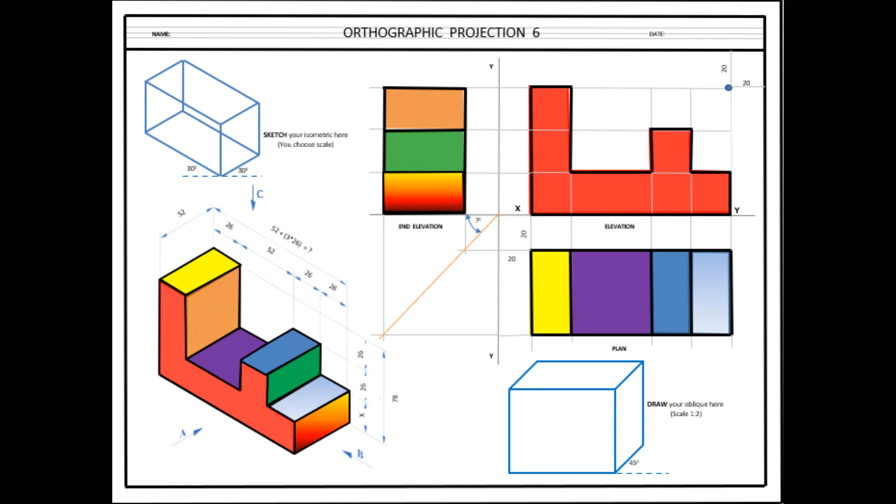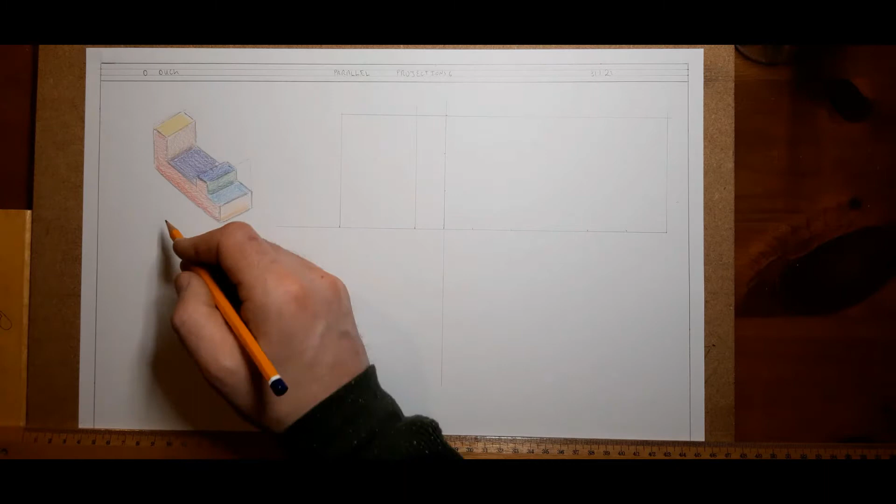I've gone ahead and sketched out my isometric here on the left-hand side. Remember, isometric is going off 30 degrees to the right, 30 degrees to the left-hand side as well. Today, we're asked to have our elevation looking in the direction of arrow A, and we were asked to have our end view looking in from the right hand side.

So when you get the end view, if you're looking in on the right, it goes on the left. So I've set up my basic crate to take that with the max dimensions, and the same with the elevation, it must fit into that.

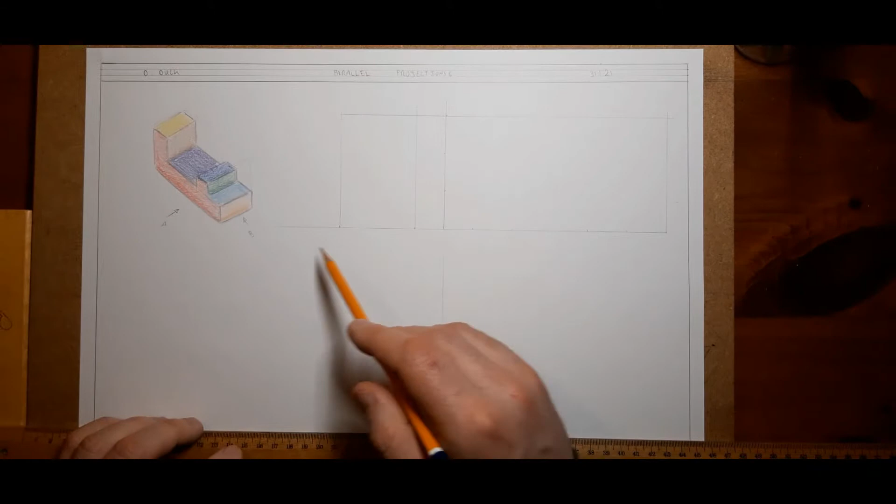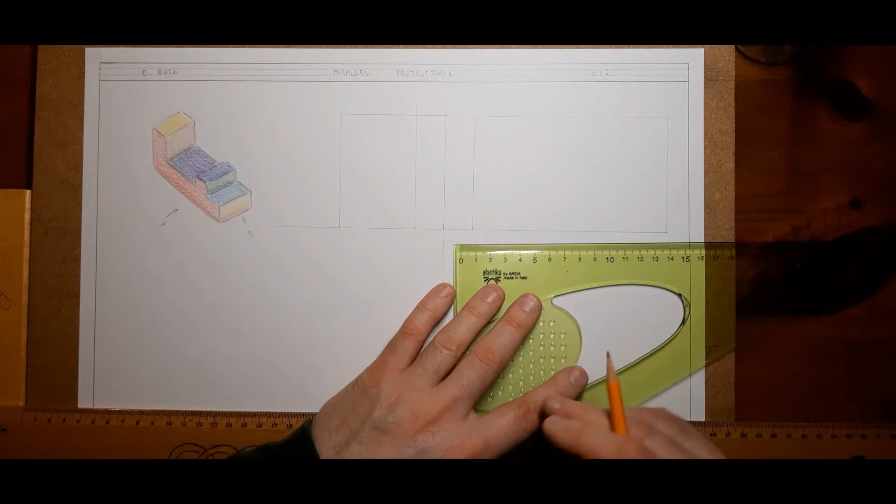We mark off 26 plus 52 is 78, plus 26 is 104. Remember, mark it off that way, add up the numbers, because if you start marking off the notches each time, you will get something called a cumulative error and your drawings will be off.

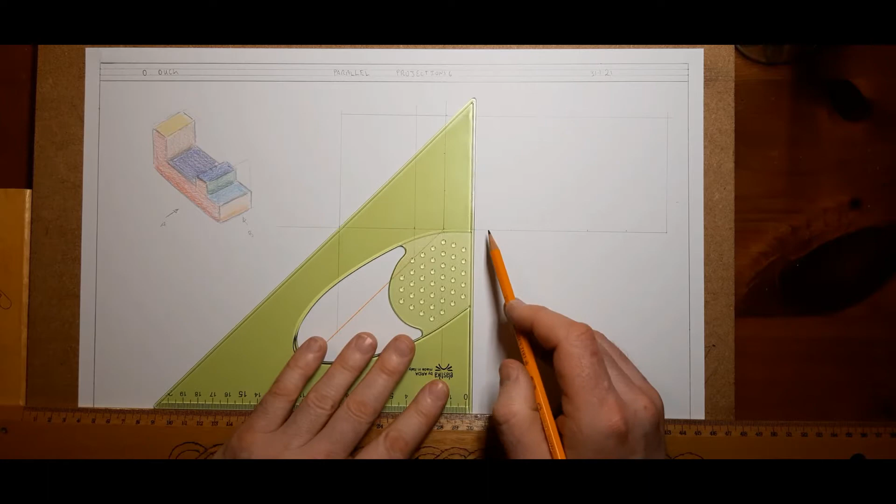When you have the crate set up like that, the next thing I put in is my 45-degree set square, and we're going to need to set up the crate for the plan view. A 45-degree line down like that, and then we don't even have to measure anything. The beauty of that, as we've said before, is we can just drop them down and bring them across. Now I need these widths as well, so I'll put them in now.

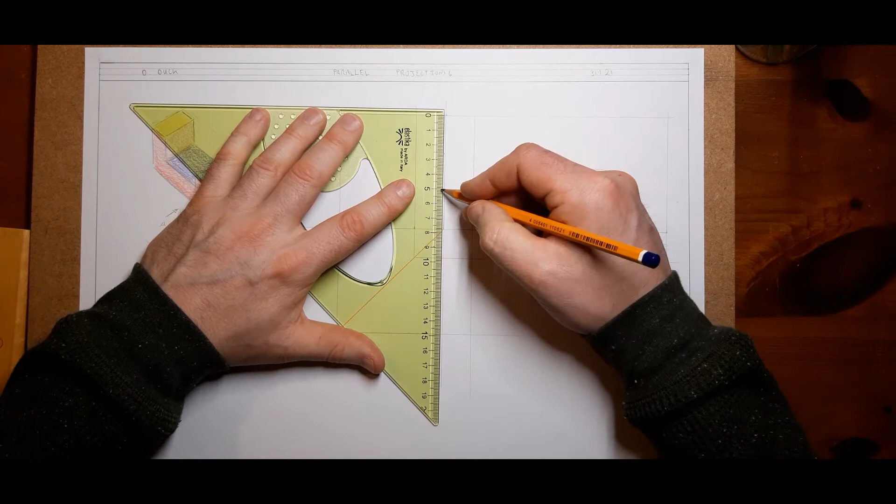And there we have our crate now for the plan view. We'll also mark off, there's only 3 key heights, going up in 26s, so it's 26, 26, 52, 78. We can start putting in these height lines. All lines in light construction for now, remember.

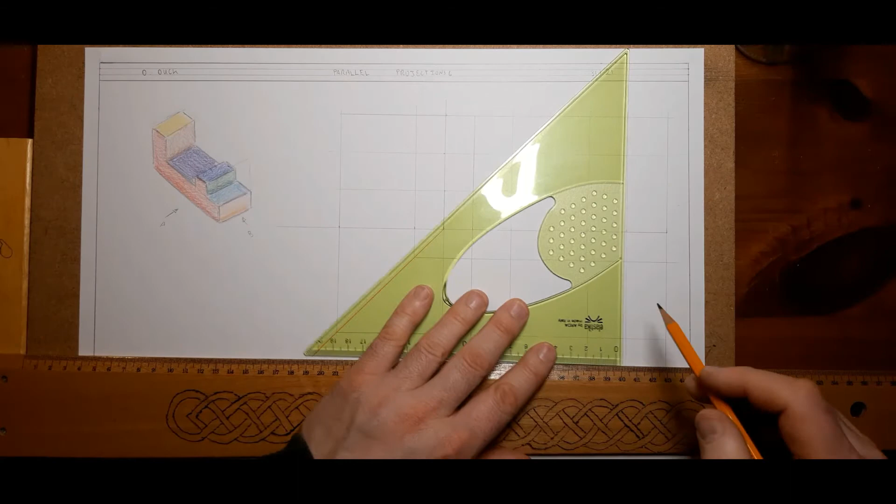Now I can start doing my drawing heavy. I might as well do the end view now while we're at it.

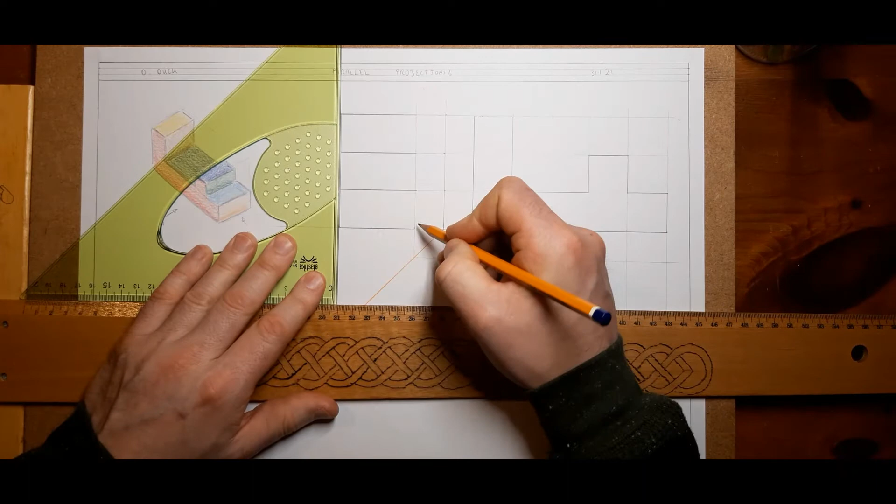Now the plan view, looking down on top of it there, and we will see the yellow, the purple, the blue, and the dark blue and the light blue. So it's fairly handy to finish out.

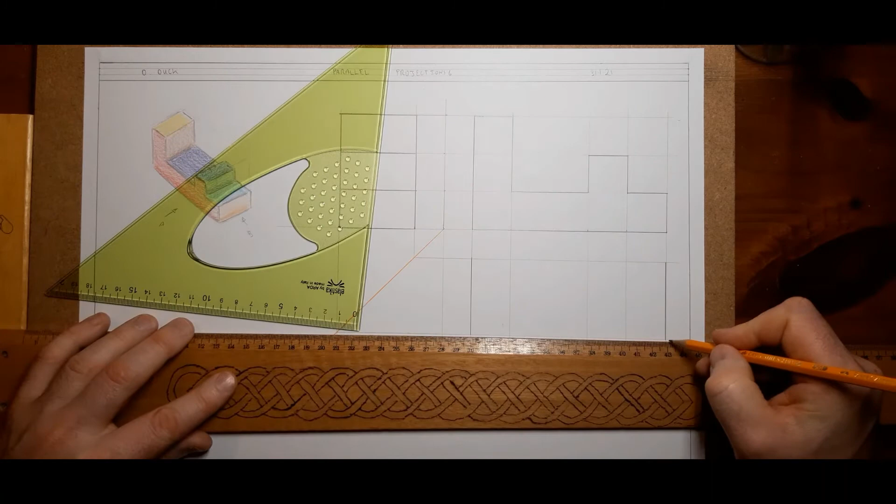I'm going to stop talking for a minute now, and colour this out to help us with the visualization.

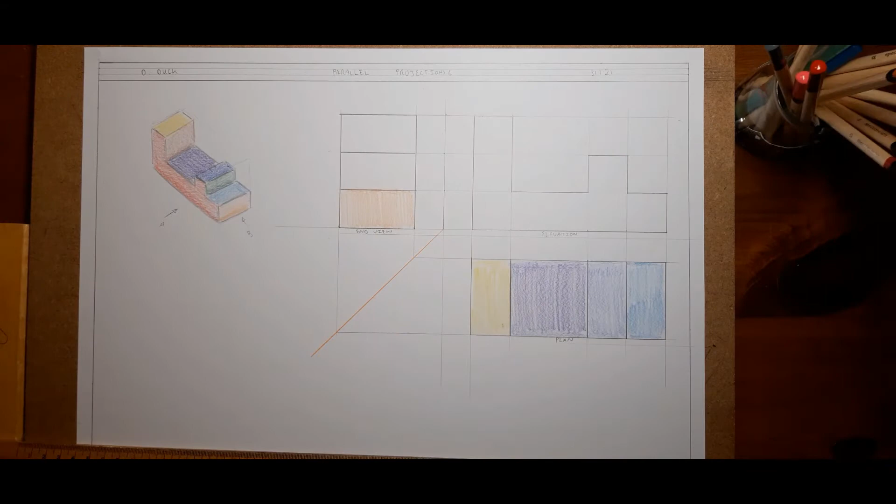Now that that's coloured, let's go over a couple of simple things again with the orthographic. We've got our isometric over here, and this is our orthographic, all this here. This will be the standard bread and butter for drawing.

When you're seeing this elevation, you are looking directly in here, as the Lego man is here. If you want to see that plan view, you would have to be looking down on top of the elevation like that. Or you could be flying down, like Superman, looking down on top of it in the end view as well.

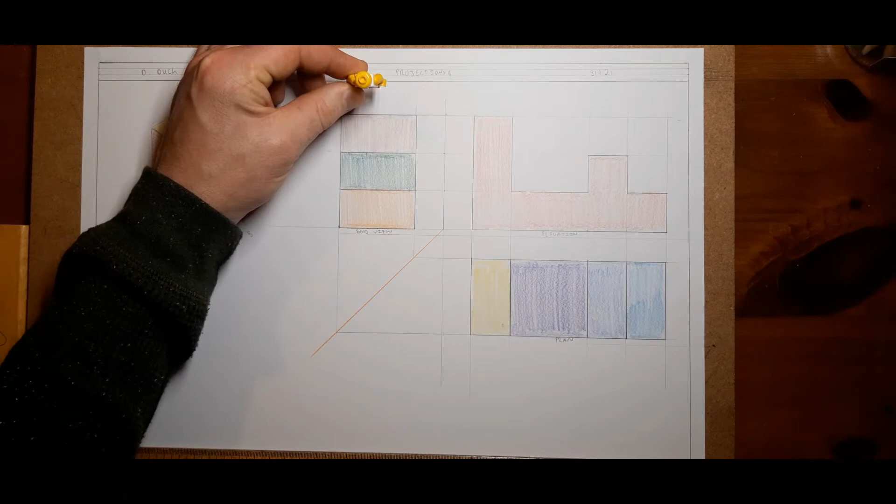In order to see that end view we're projecting over here, we're standing, looking in on the right hand side. And that means the end view goes over there on the left, like so.

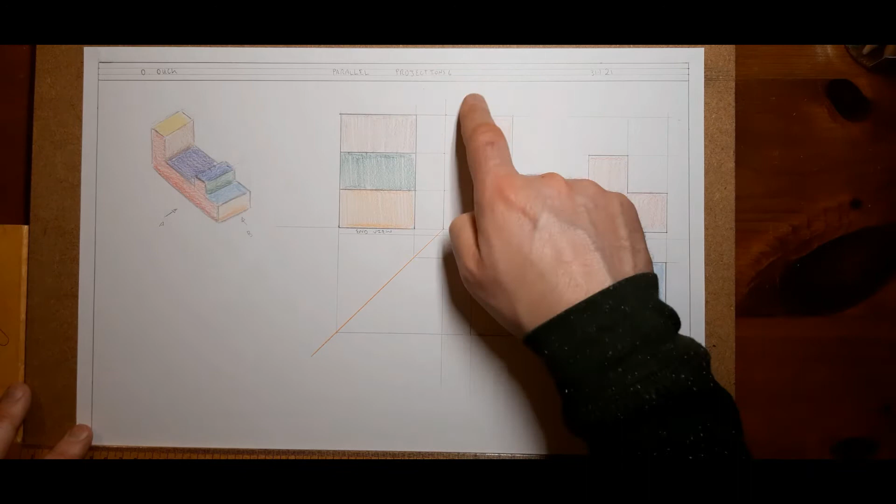The last thing we have to do in this question now is a scaled isometric. We're still going to use the same measurements here, so the max measurements are 78 by 130. I'll start that down here.

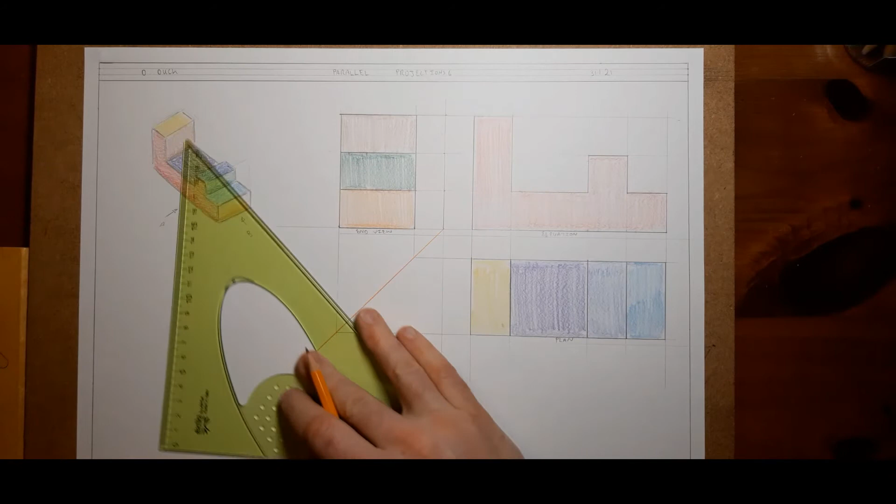The scale on that is 1:2, so we would halve everything there. When we halve 130, that gives us 65. When we halve 78, we're going to get 39. Then it's half of the 26s, so that's giving us 13s.

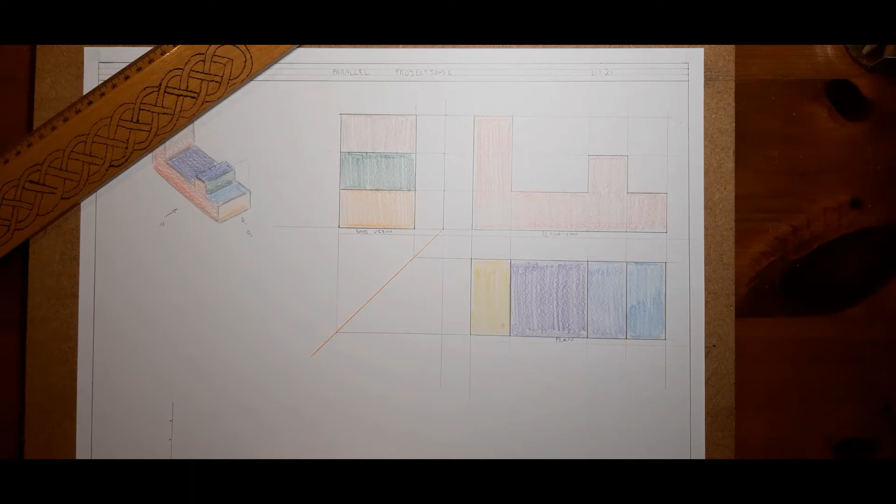So you're coming in there 13, and then 13 plus 26, because it's half of 52 now. From there to there, half of 52 is 26, so that gives us 39. Another 13 then after that, because we have this 26, we'll just add on 13 onto that again. So that's 39 plus 13 is 52.

Now we set up the front side of our box, and I do often draw in the front. I'm going to draw this red piece on the front, just like in the elevation, but scaled. Remember, isometric is going off at 30 degrees.

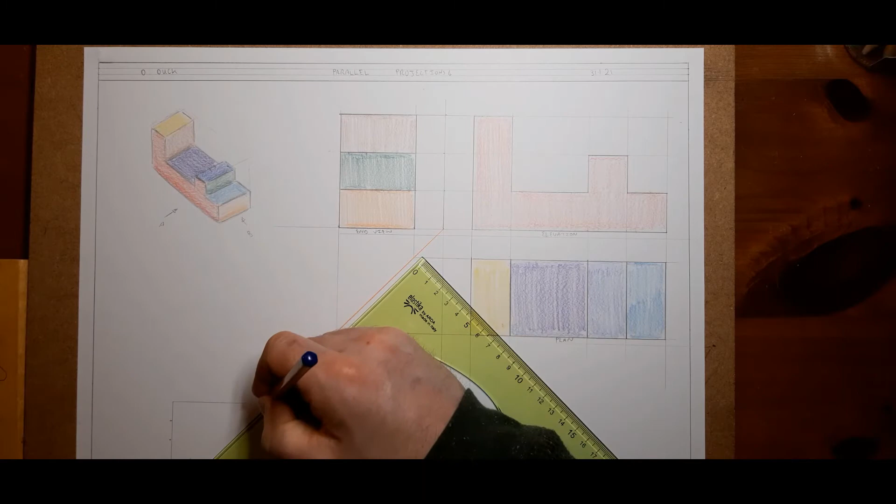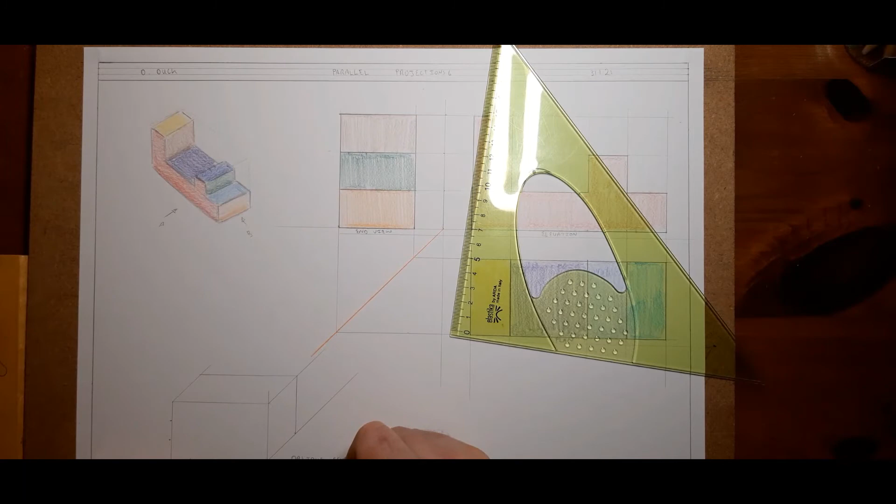Now the oblique, the width there is 52, so when we scale that 1:2, that is 26. I'll bring it across there like that, and we'll write in oblique, scale, and always write the scale in the drawing, very important, 1:2.

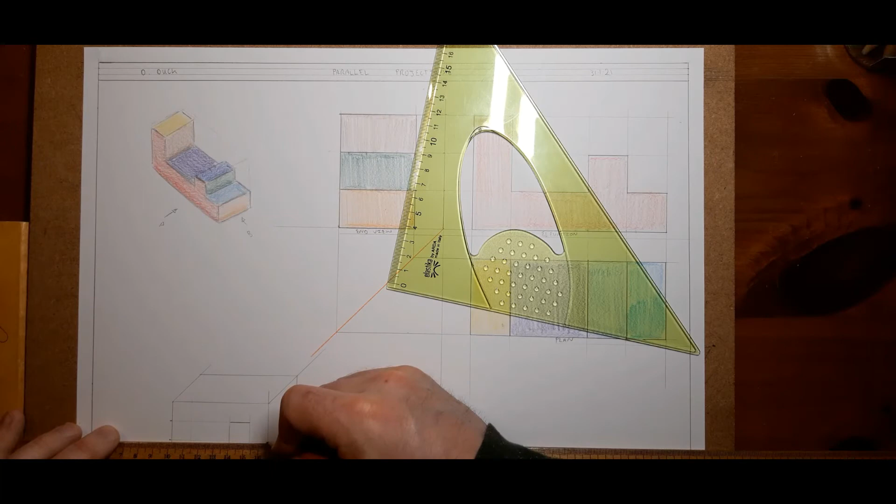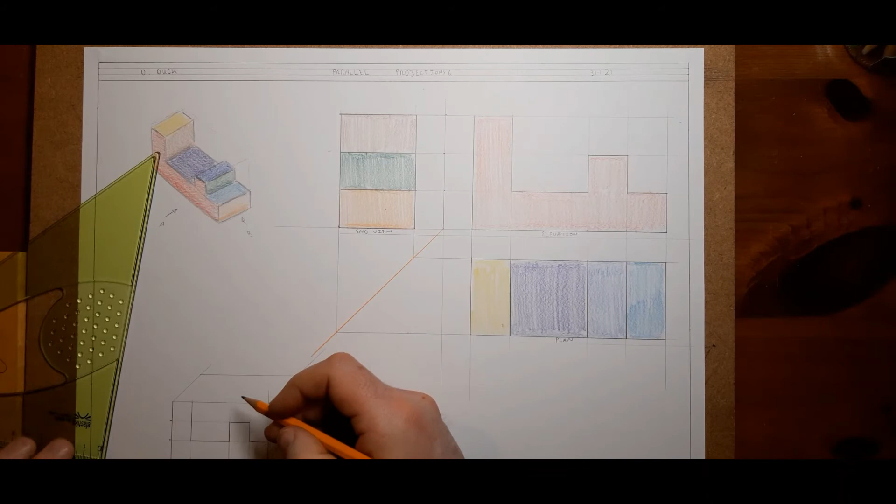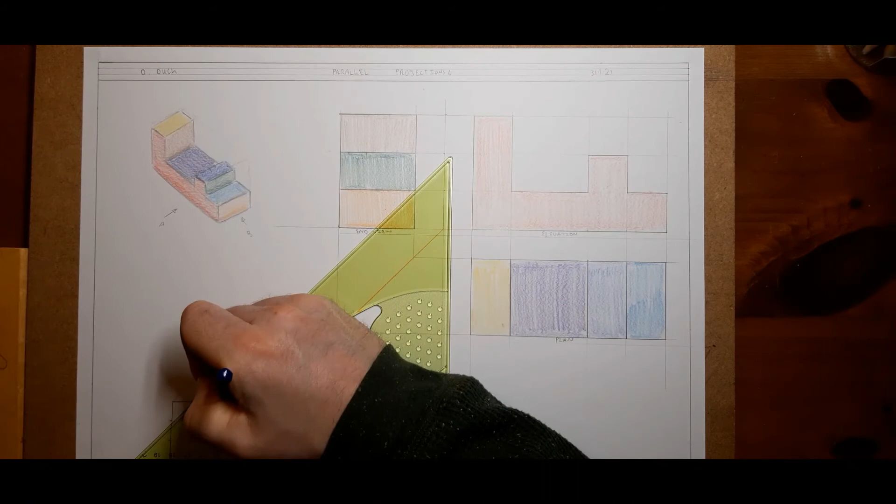So we'll go ahead now and draw in this half size version of this red face there. You can do a series of light lines going back there to find out how far they're going back. This one we know we can go right to the edge of the box there. It's there, drop down there.

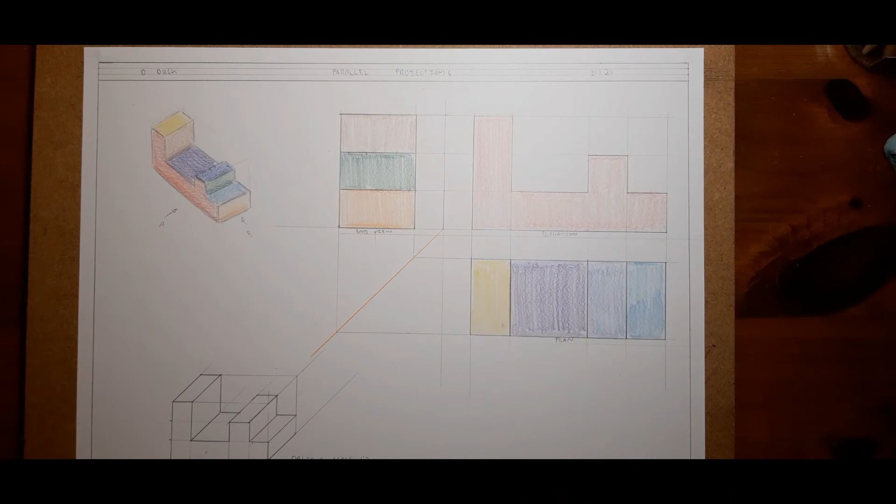Now with that oblique finished, we'll just go ahead and colour it in.

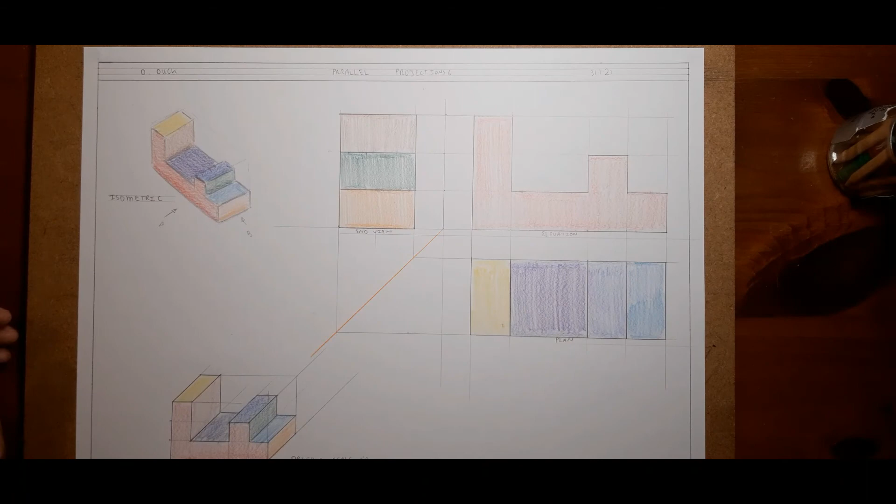So folks, that's our parallel projection 6 done. We've got our orthographic over here, our oblique down here done at a scale of 1:2, and our isometric sketch up there in the top left hand side.